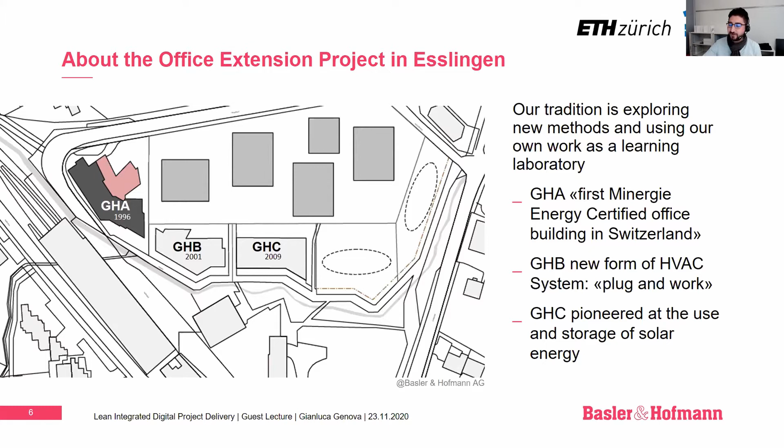And then when it came to the question of the A building extension, we really took this radical decision by saying, okay, it's time to digitalize, it's time to do it at the latest state of the art, and we said we are going to build this building with a BIM methodology, and we are going to build this building without drawings. And that was our first challenge with this project.

So the project is not complex in itself. It's really simple, an extension building. It contains a cafeteria, an extension of the Mensa, the canteen. It has an additional 12 offices on the top, so it's nothing special. But what is special is it's an early adopter BIM pilot in Switzerland, and it was the first project which was fully constructed through a model without using any drawings, or printed drawings, let's put it this way, to be more consistent.

And that's the project where we were lucky, I would say, to win the small project award from Autodesk in the AEC Excellence Awards 2 years ago. And we were also nominated for the innovation category in Arc Awards 2 years ago for this project.

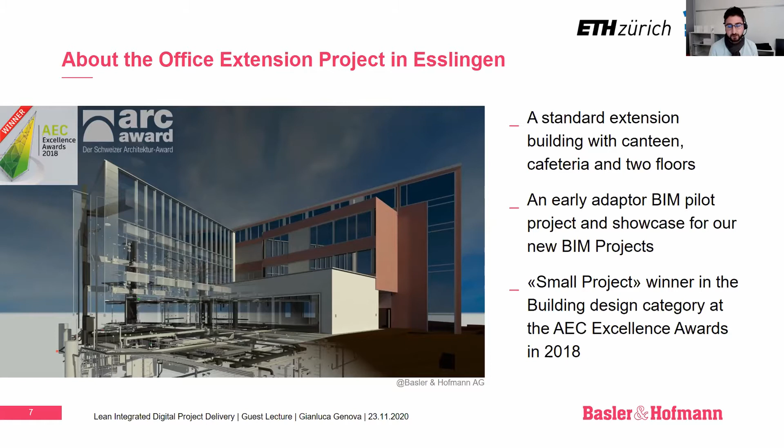So what is special about this project is every participant involved in the project design was from the beginning in this single model. Everyone was working together. Even though the architecture company was not Basler Hofmann, we still managed to integrate it in the model by repeating his work and establishing it in the same model together with him. And at the same time, by forcing everything into one model, we created a single source of truth, making sure that the model is the center of the project.

And because it was our own building, from the beginning it was clear that we wanted to use it for the entire life cycle, because once it's completed, we knew that we are going to live with that building. We will keep the model, and we can use it as a digital showcase to encourage the employees in the company, as well as the clients, to show what is possible if you really go for a fully digital approach.

And we wanted to build it without printed plans, not because we wanted to save paper and do something nice for the environment, but because we wanted to change the mindset by taking away from people the most conventional tool they have, the paper and drawing, forcing them to think in the information model, to think about the model, to think about the processes. If someday we didn't have any plans or drawings anymore, what would you do? To answer this question, we forced them to actually do this. That was the driver behind deciding to not use plans. And we also wanted to try as many new technologies and construction methods as we can in this building.

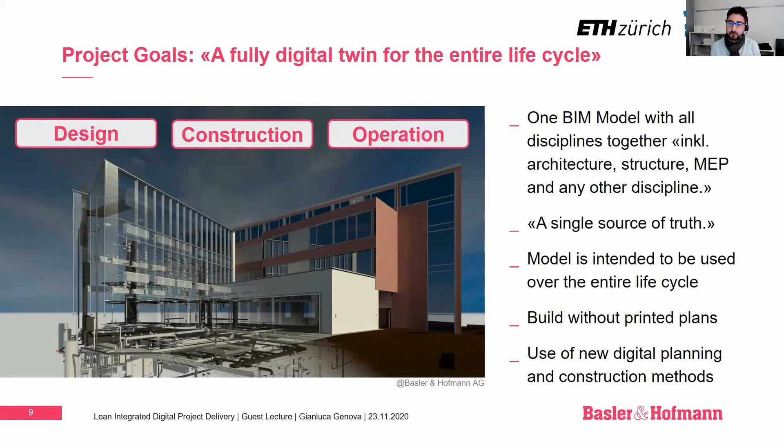I already said the motivation of the printed drawings, but of course, these conventional 2D plans we could neglect in the way that we designed, but we couldn't avoid them for certain processes that we couldn't change because of legal reasons, cultural reasons, and so on. So we did have the plans, we just didn't use them, we didn't create them, we didn't print them, and internally we didn't use them.

But a good example is the permit: to get the permit from the canton, we had to print the plans because they had to stamp them somewhere. So at the end of the day, we still had to print the plans, but we forced it as much as we could, and surprisingly, we managed to build the building without printing the plans. But of course, we still had this 2D view in the project.

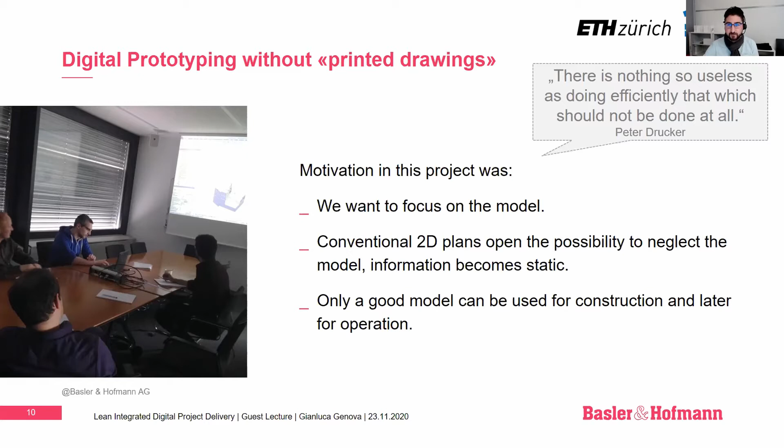So what I always say here: there's nothing so useless as doing efficiently that which should not be done at all. We should not focus on how we can create this 2D illustration of the model faster, because the model itself is smarter. That was also our driving idea here, to not focus on the details and the things that we shouldn't do at all. Instead, think differently.

Starting from the design phase, it was clear that a good BIM model, which has to go over the life cycle, has to be of good quality. So we really have to have an approach to build an intelligent model. Now I will give an example of the MEP design, because that's where my team is and what we are more familiar with. So I will give all the design examples in MEP, but in the construction stage I will be more generic.

In MEP design, there are some aspects which made a model-based or data-driven approach really intelligent, key things that have to be implemented in a model. First, we have to use the advantage of real-time model coordination. I will explain a bit what I mean. We believe that a product-oriented design is essential because you want to know what you are going to build and make sure that such a product exists. System logic embodied seems logical, but I can assure you that most models in the market don't have this logic embodied.

And calculation and simulation from the model is a natural thing you would think a BIM model should be able to do, but again, you have to have really consistent data and a consistent data structure, and your algorithms and simulations should work together simultaneously to actually realize such simulation calculations.

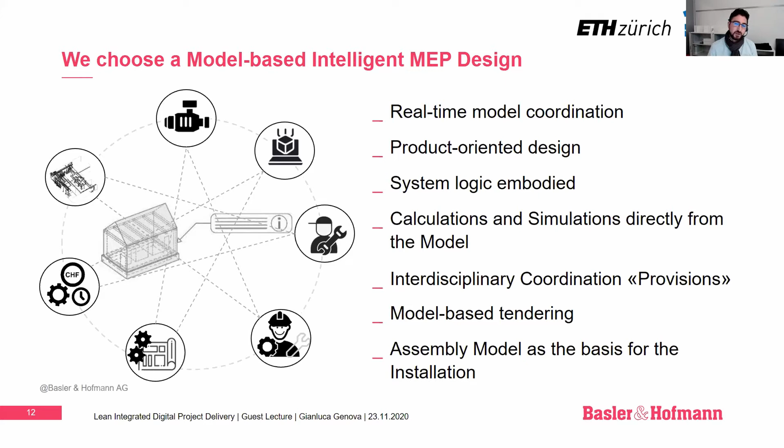So, real-time coordination. Maybe you heard about clash detection; everyone tries to avoid clashes in the model, and everyone would say the best benefit of BIM is clash detection. Well, that's true, but I think that's not the integrated approach we are looking for. I'm more interested in clash avoidance instead of clash detection, because everyone is synchronized and integrated. Why would you even create the clash in the first place if your technology allows you to see what the others are doing? That's the approach we want to implement.

And since then, that's the way we work in our company. We do clash detection just for quality assurance, not as a base or standard process. If you are familiar with Revit or any BIM authoring tool, you know you have this kind of work separation, where every element belongs to someone. There are boundary definitions so that everyone can own an element, close it and block it. Well, that's a good thing.

That's actually how we managed to work all together in one model. But that requires a lot of discipline, a lot of respect for each other, and a lot of communication that people were not used to before. And that was a big change management that we learned through this.

And always when we model something, we have a culture: we always go from the consumer to the source. Meaning, if you know the endpoint where you want to go, you place that first and you model from that back. So on the way back, you can then see other people. The closer you get to the technical room, the more efficient the coordination actually is. That's the kind of thing that we establish. And more communication is necessary.

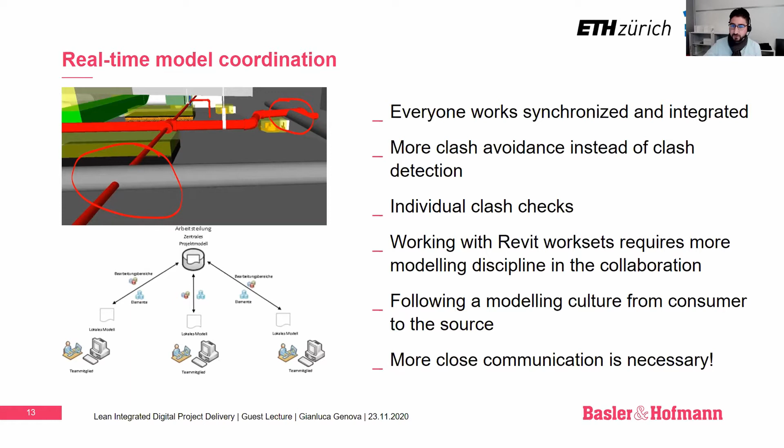You can imagine it like this: modeling all together in one model is like moving on the construction site all together. Everyone should be aware of everyone's movement. You should know who is where, and that requires a lot of communication, which is a good thing, which we didn't do enough in previous times.

Product-oriented design is, I think, the second thing from the intelligent model. Some people will still say you can also do it with generic families or generic objects. They just have to look similar. True, but the thing doesn't just end with the geometries. It has a lot of product-specific information that also influences your internal processes in the model project. And the actuality of this data is something that we as a construction engineering company cannot follow. It's impossible to know all the products in the market and all the data, so we don't want to take any liability with that.

And then functionality is really important for the calculations and simulations. I told you it's really important that there's a consistent structure in everything. That's why you cannot just use the product element as itself in the model. Of course, there are databases or libraries in between that make sure everything is in a certain structure. But what is important is that the functionality of these components is ensured, so that we can do calculations with these elements and the data are correct.

Another thing is, maybe every pump looks the same, so you can say we can use a generic placeholder for that. But there are special things in every product; the installation points are really different. So if you want to make sure that this model is an assembly model in the end, every element that you use in the project should have a certain reality in the backend.

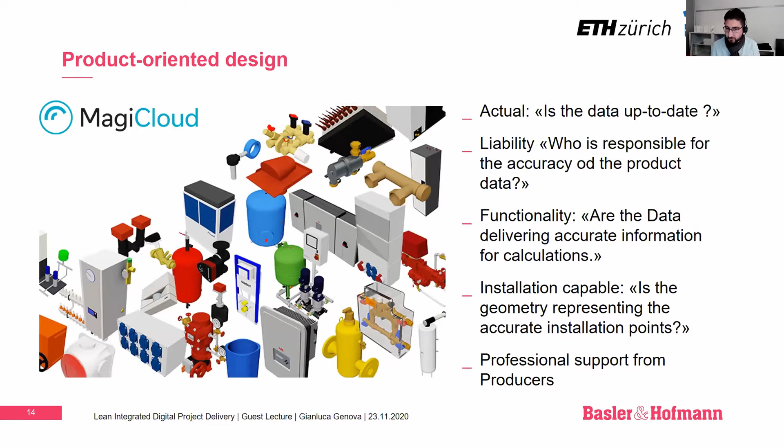And if you do a product-oriented design and you know which products you're going to use, you also get free consulting from the producer, because they are happy that you chose them. It would be a waste if you don't use the potential of this ecosystem.

System logic embodied is really simple. It's the difference between something looking geometrically correct and something being correct in terms of data technology. Every component should belong to a system. It's not just in building systems; it's the same in structural engineering and architecture. Everyone has its own system, and you have to build these data layers into the elements for many reasons.

These things ensure that you don't forget anything, and they also give you potential. They make the calculation possible and help you handle the model in a meaningful way. Because if I give you a model like the one in the picture, it looks colorful and nice, but at the end of the day, a specialist cannot do much with it if the subsystems and systems are not embodied in the model.

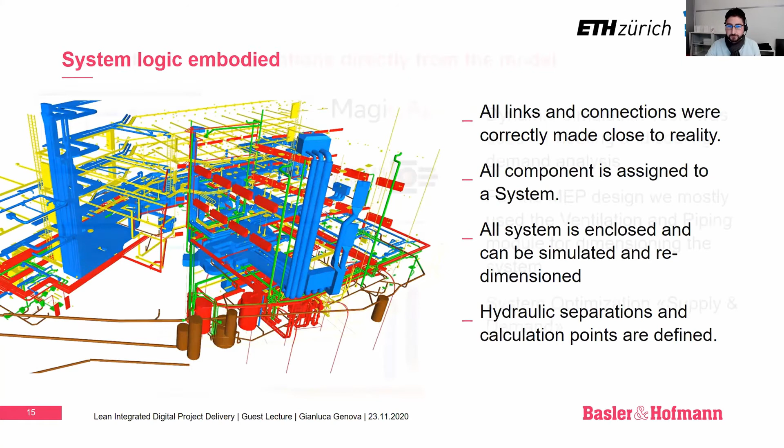Calculation simulation. I will not go into too much detail since you are not HVAC engineers, but what is important here is that the model is used for a supply and demand comparison, that the model is providing the design, the capabilities, the engineering that the client is requiring. And these kinds of things can be ensured through these calculations and this kind of comparison.

You can quickly ensure that every room is heated accordingly, every room has enough light, every room has enough water, and so on. And you can do this kind of comparison really fast in a model-driven or structured model, I would say.

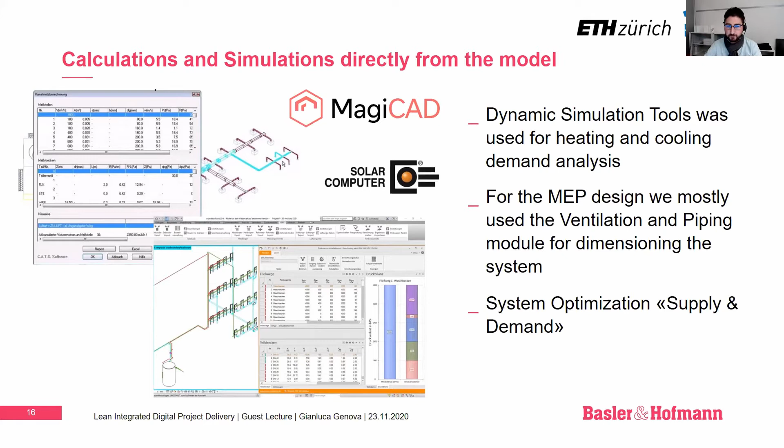Interdisciplinary coordination is coordination when you have more than one discipline involved. A good example is a hole that you make in the wall. A simple hole in the wall requires a lot of coordination. It's not just a structural engineering thing. It starts with the MEP designer requesting a hole in the wall, then the structural engineer has to prove whether the hole affects the statics or not.

Then the hole has to be closed. Then again, the fire protection guy ensures that this hole is not affecting any security, fire issue or code. These things can be done with emails and PDFs here and there, or you can do a smooth data-driven approach by using the model to do this checking through a software, a solution, a workflow that you develop. And that's what we did here.

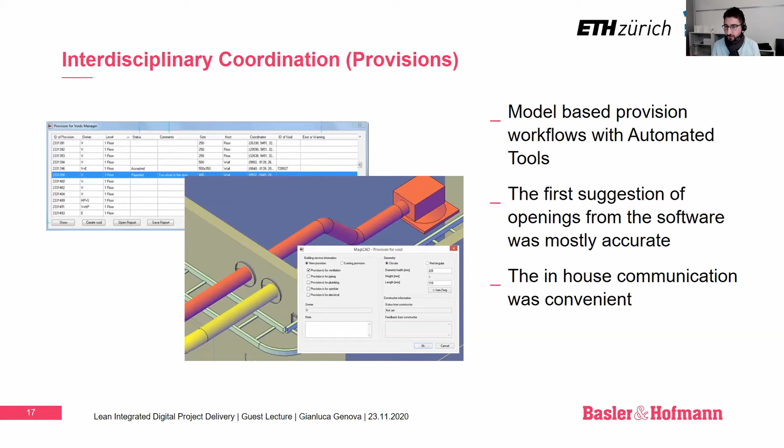We used a software which helps you automate and coordinate all these inputs from different disciplines, and when everyone approved, the hole was opened. And if something was rejected, a suggestion came back. Usually such a process would take a week in a conventional way. In this project, it took us at most a day. These are the added values of working in an integrated model.

I think this is the part where most companies are questioning: when you build such a model, how can we do the tendering? Because most installation companies or contractors are not used to seeing models. They are used to evaluating drawings, and if they don't get the drawings they are used to, they will have a hard time giving a price.

We were actually not sure in this project when we started whether we would get any bid from any contractor, because we knew people would get scared and not everyone would take the risk to do it the first time. So we decided to keep it simple. Let's choose some good partners who can see this as a chance and collaborate with us. We gave them the model and told them, okay, give a price to this model.

We maybe prepared some schedules, but we didn't prepare any paperwork or drawings to help them. We told them exactly: what we are seeing in the model, we want built. So how much does it cost? That was not the ideal approach, of course, but at the time we didn't have anything. We hadn't established any workflow to handle the tendering. And interestingly, it worked out fine.

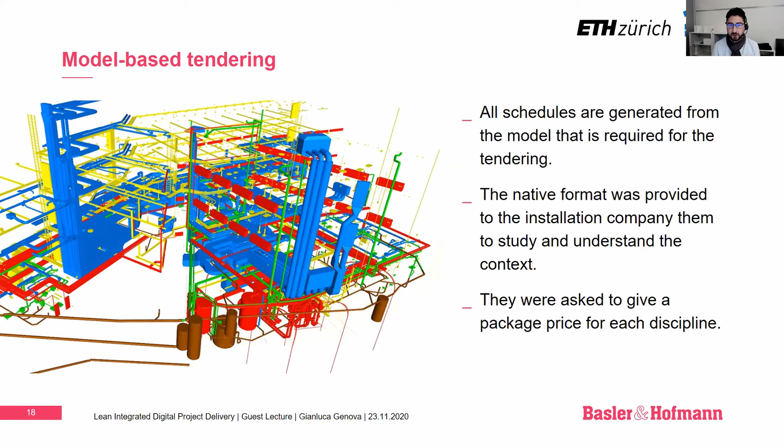Also when the building was completed, we didn't have any issues, and the stakeholders were happy that they didn't have to do all the paperwork, and they could think about the details really early, discuss solutions with us, optimize the model. Those were the added values of having a model-based tendering in the first place.

Then when the tendering was completed, it's not that every model can be built. You cannot take every BIM model to the construction site without negotiating with the installation company to make it an assembly model. Like I said, a building information model is not a building assembly model at the same time. A good example to understand the difference is the duct example I always give from this project.

Imagine a designer says, I want a 10-meter duct. For them, in terms of HVAC engineering, that's just okay. The air flows 10 meters straight through a floor. But for an installation company, there are certain parameters that have to be considered. First, these ducts are produced by a machine.

So this machine cannot produce every length. Every machine has a different maximum length. In this case, our producer was saying a duct can be maximum 1.85 meters. So this is the limitation that was given. It's a parameter that we should know when we build a model.

Secondly, you have to consider the accessibility, the logistics. So there are a lot of things which influence the assembly model. And then where the cut has to be done because of statical reasons, because of other things. And all of these things, a normal design company would not know in detail, because they never had to deal with this kind of thing, because in the early days it was really easy.

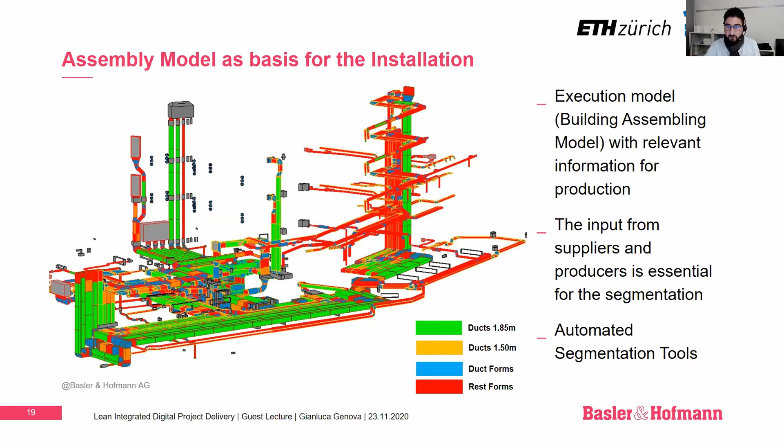And the same we did with pipes, with ducts, with every cable tray, or with other components which have to be segmented. Yeah, that was a good learning, and that's the difference between an assembly model and a building information model. And then we went to the construction site. Building from a model, or model-based construction, requires different methods. I will just briefly give some examples of how we can build a building from a model.

When you have a BIM model and you have it segmented and you make it as detailed as an assembly model, after that, the production is something that you can also do data-driven. So I will go back to this ventilation example. If you have the segmentation there and you know every duct size, what you can do is extract this data and feed it directly to a CNC machine to produce this duct. And we have two advantages here. One is you can control that every product which is produced has an equivalent in the model.

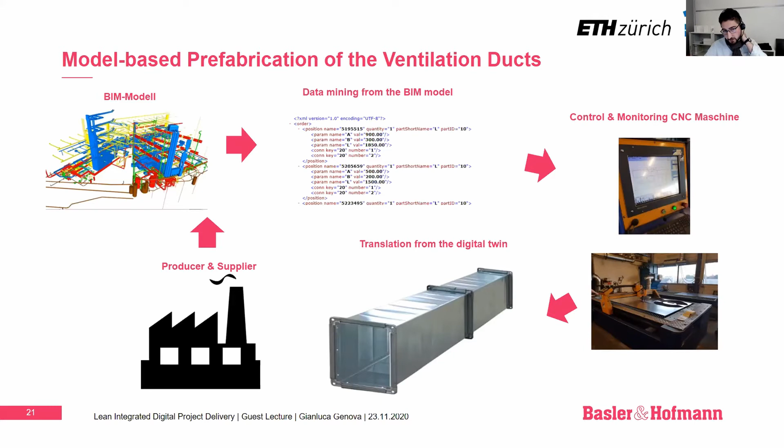Secondly, you can, in this process, hide information within this code so that when it comes to the site again, you can recognize which part of the model it was. So that was our advantage. We hid a Revit ID in the production code so that when these ducts were produced, the producer didn't know what that code means, but for us it was a big link back to the model. So they just stick the papers on the duct and they send it to the site.

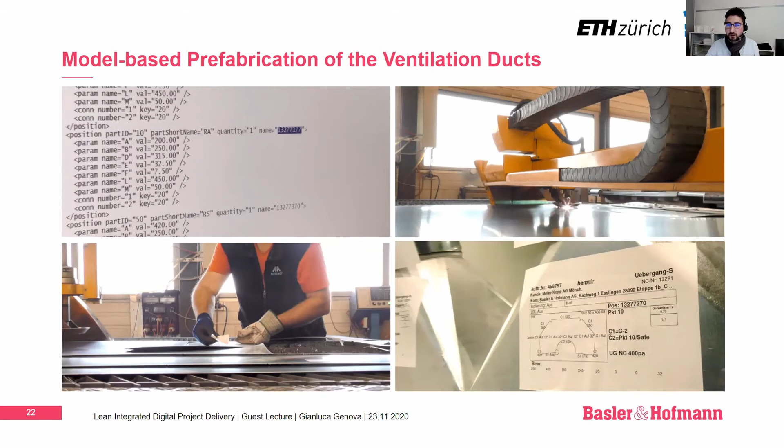And then something cool happened: we could actually manage the logistics with this. We could know exactly which duct has to be installed in which part of the building, and that was a big help. And another thing is the staging. If I would give you the model that I showed you before and say build it, you don't know where to start with the model.

And this is something that we call staging. I mean, staging is not new. It's something that you would also do with the drawings. But in the model, it requires certain preparation beforehand, so that when you're on the site, you can view exactly what you need, so that you don't always see the whole model at once. You just see the information that you require for that part of the installation.

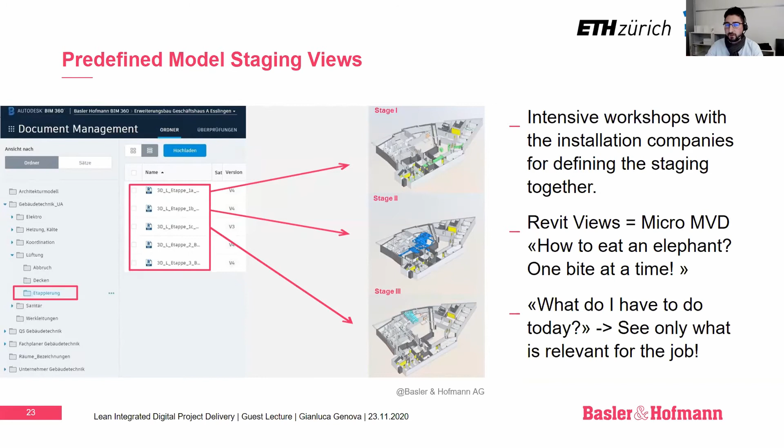I always like this saying: if someone gives you an elephant, how are you going to eat it? You will say one bite at a time, and that's exactly what you do with the model. You cannot build everything at once. You have to go step by step, and the installer will ask you every day, okay, what do I have to do today? Is it possible that I see only the things that are relevant today? And that's exactly what you have to establish in the model beforehand, so that they can handle this on the construction site.

So there are certain model-based assembly methods that we used in this project. One is the visualization model view. It's like using a model viewer directly, visually. It's not different from drawings. Just instead of seeing 2D drawings, you see 3D models.

It's still the same, but it's just cooler. And the second part is the method. It's the point-to-point method. It's really simple. You take a point in the model. It shows you in reality which point is that.

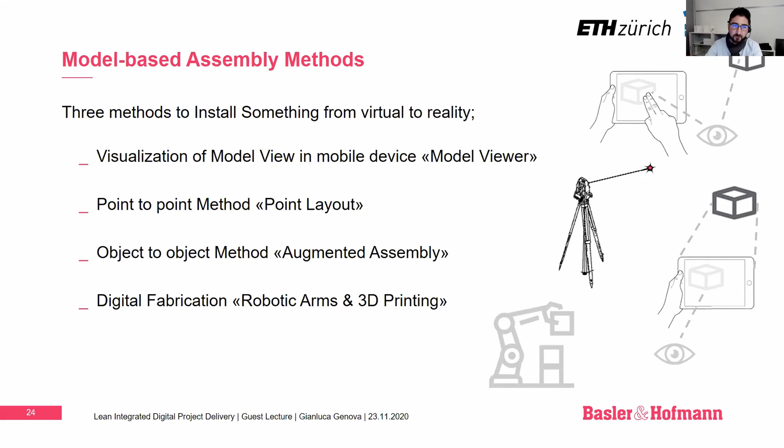Object-to-object method is really similar to the point-to-point method. Instead of taking the point, you take the object as a whole. And digital fabrication is like you don't need the human being at all. You let the robots do everything themselves, and that's where you just rely on them to print or build accordingly. So it's more like they use the object-to-object method and point-to-point method combined, but it doesn't matter. The robot's gonna do it anyway.

So the model viewer version is really simple. Like I said, you have certain staging views that you need to view, and then based on this view, you can measure it from the tablet or whatever, and you can build it accordingly on the site. There is no real added value compared to drawing. You just see it better, you can see the coordination better, you can see the relation better in 3 dimensions, but the information which is delivered is not that different.

So nothing disruptive here, except instead of using a paper, you use a tablet. It's still better than drawing. We don't need to prepare these drawings for each effort, but for the installer, it doesn't change that much.

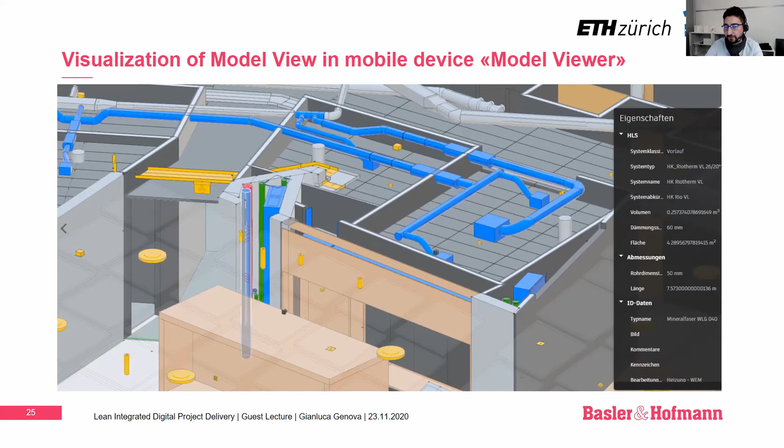So the second method, which was point-to-point layout, is actually a really cool thing. You can select certain strategic points in the model which you think are important. Structural engineers love it. Point by point, they built the whole building. They use it for each column, for each wall, and a corner from the component. And the guy with a pen places the points one by one.

For structural engineering, it's great, but also for installer companies, for example electrical engineers, which have hundreds of components in one room, it was a big help, because you could just place this machine in the middle. You could select any point, and it will tell you exactly where the switch is, where the light is, where they have to make a hole, and all these things. So without using any meter, they finish a room in half the time they would need in the conventional way.

So these are the added values, and the accuracy is really high. Of course, human beings can make mistakes everywhere, but I can assure you on the construction site more mistakes happen. That's why getting a bit of help from a machine with laser accuracy is always better. I'm not saying that people will not make mistakes again, but still less than before, for sure.

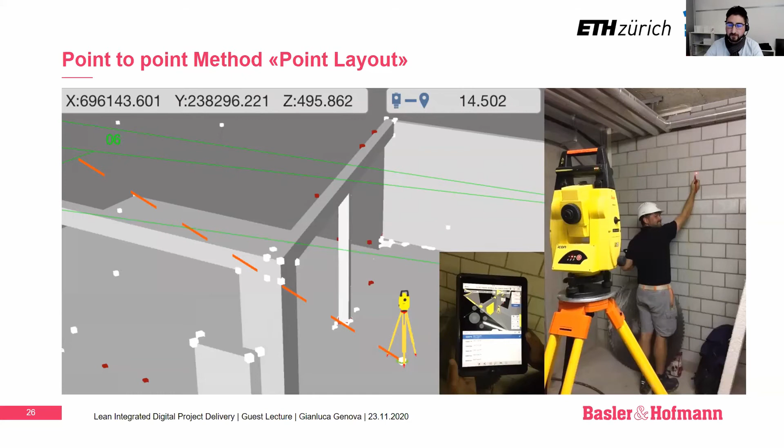And now the third, the object-to-object method. If you remember the duct example and the production that we did with the duct, we managed to stick a paper on each duct when they were delivered to the site. So the only thing that you need now is some device. It can be a HoloLens, a fancy AR solution, or a simple mobile app, doesn't matter, which scans this code and tells you which object it is and where it belongs.

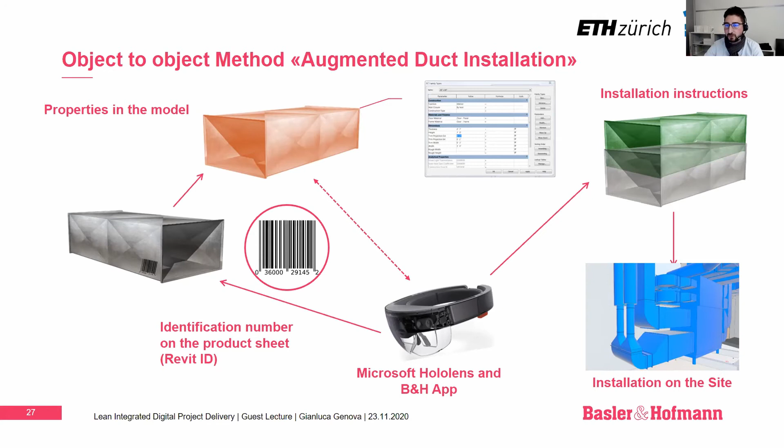You can use this for simple logistical problems. But if you want to make it cooler, you can use AR to scan the duct, and the AR tells you where to place the duct, and even checks if it's placed correctly. So that's what we tried to develop here. It was more an innovation thing to make something fancy, but if you just take a part of this technology or method, you can optimize a lot of processes on the construction site.

So we developed an app, of course. We had to, because that was possible at that time. But the installer guys just use it in a larger room where it's safe to move, because if you ever use these kinds of glasses, they are cool, but they can't ensure that you don't hit something while walking, so it's not really construction safe. That's why you cannot use it on a really dangerous construction site without someone observing you.

So actually, there is no saving if someone has to observe the guy using the AR, the other guy has to use the AR, and two guys have to place the duct. So you need 4 people to do a simple job that before maybe 2 people were doing.

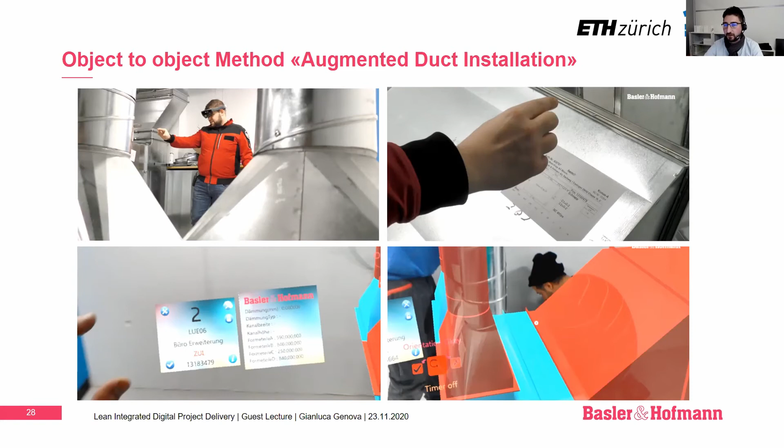So it's nothing optimized here. But in the future, I think once the AR are more safe, installation guys can use them themselves, and then you can optimize a lot of processes.

Right. So another object-to-object method, I mean, it doesn't have to be a duct, it can also be a wooden piece, is this acoustic wall that you see now in this picture. It's a research project, actually. It's part of our cafeteria decoration, but it's also an ETH research project together with Gramazio Kohler Research and the Digital Fabrication Lab, together with Erne Holzbau, which is our industry partner in this project, who actually built this acoustic wall.

What is special about this wall, or this acoustic installation, is it's firstly produced by a parametric design, of course. Everyone knows Dynamo, Grasshopper, so that's nothing special about it. But there are two special things on this project, maybe. One which I found special is this object inertial tracking. That's the fancier expression of my object-to-object method, but it's the same, not different than the duct. For each wooden piece, it will tell you if it's placed according to the model or not.

But what is more interesting is that the shape that you see here is not just a nice looking shape because it's decorative or aesthetic. It's because the design was informed by the result of an acoustic simulation. So actually, we did different measurement tests in this room, and we took the negative of the simulation results to reduce the noise at maximum with just a unique shape, right? And that's always nice because it's physically informed. It has a physical meaning behind it, and usually forms that are defined by nature are the most beautiful and aesthetic ones.

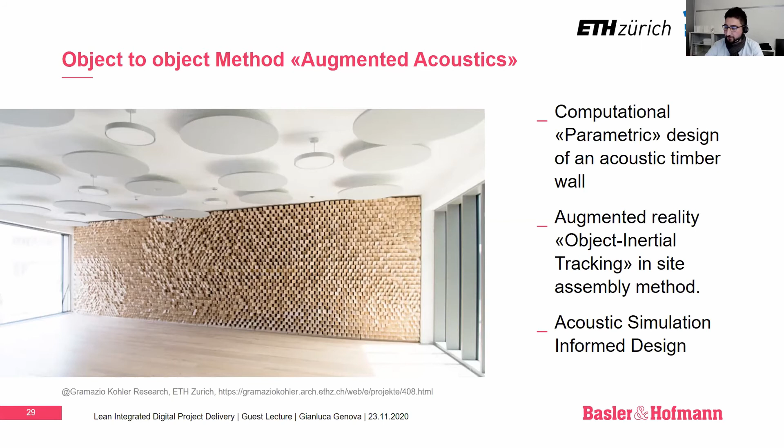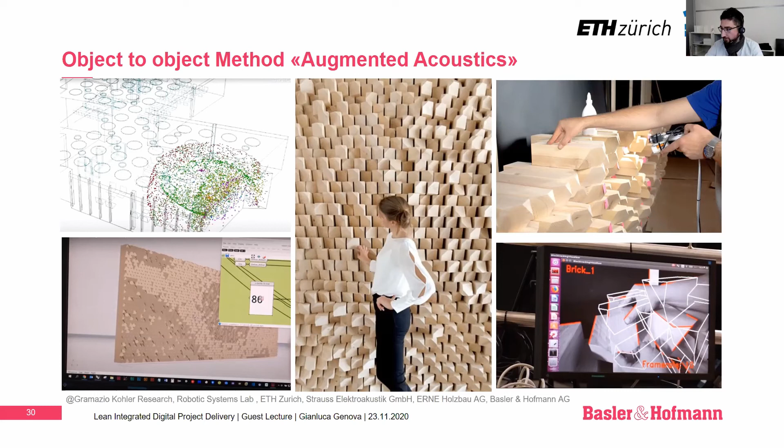So you can see the simulation here. That was the input to the parametric tool, and on the right side you see the AR. This time it's not a glass, it's a camera, but principally the same. It checks if objects are in the right position. If not, it's red. If it's green, it's cool. So basically that's how it works. And you don't need any drawing here to build this wall. Actually, I don't even know if you can build it with drawings, but that's, I think, the cool part.

The next digital fabrication example is the future tree. You see the wall, it's in the cafeteria, and just outside this cafeteria and the mensa, there's this fancy tree, we call it. It's a combination of parametric design and robotic prefabrication. There are two different technologies you can see here. One is the column that you see from the tree is 3D printed. It's called Eggshell, also together with ETH. It was a collaboration project.

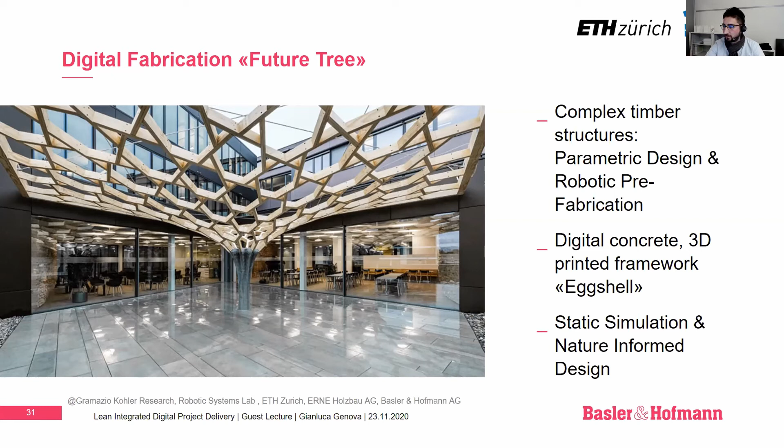Also with Gramazio Kohler Research, ETH, the Digital Fabrication and Robotic Systems Lab, and Erne Holzbau again for this construction. And this time, what was the shape giver? One was the statical simulation, and another was the natural limits of the material. So these two were the drivers of this design and this shape. So when we say data-driven design, it's not just data that we produce, there are also scientific data that can inform a design.

So what is special about this is the 3D printing part. So actually we didn't print the concrete, we just printed the shell. And the shape of this shell is unique because of the durability of this material. It's a plastic polycarbonate component, which I think took several tries. If you are at ETH, you can go down to the labs, and I think someone from the lab can explain it to you in more detail.

But what is unique here is, if you see the shape, it doesn't have too long cuttings. It always has this unique diamond shape, and this is because it uses minimum material to withstand the maximum pressure of the concrete. That's why this shape is made. It's the result of the material properties, and that defines the shape. And it's also aesthetic, but it's more cool when you know the scientific reason behind it. And then the steel was a prefabricated steel piece, installed inside, and it was cured.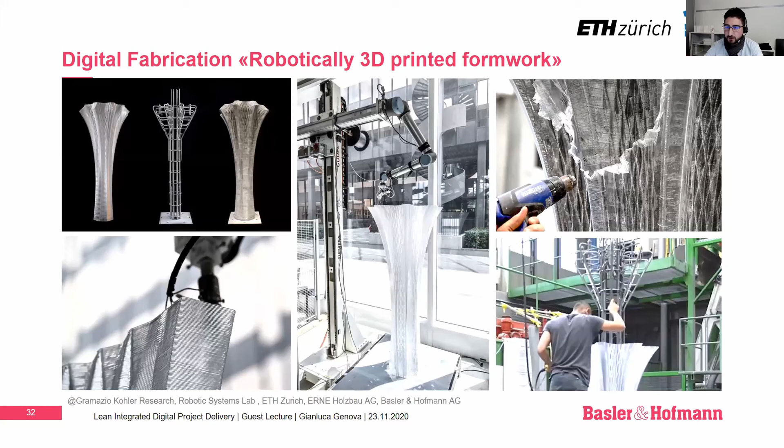And then it's called eggshell because you can then peel the polycarbon formwork out of the concrete wall column. And the robotic assembly arms are the same. We have this parametric model with all these nails pre-parameterized. I mean, you could play with the geometry and it will adjust itself. It's a statical model that was behind it. And once you have this model, the robot arm will just install it based on this 3D model, this upper part of this roof tree.

It's exactly the same technology which is used in the Arch_Tec_Lab in ETH. If you look at the roof, it's exactly the same company, the same robot, and it's the same technology. But the only difference is it's like a self-standing tree. It's just a different form.

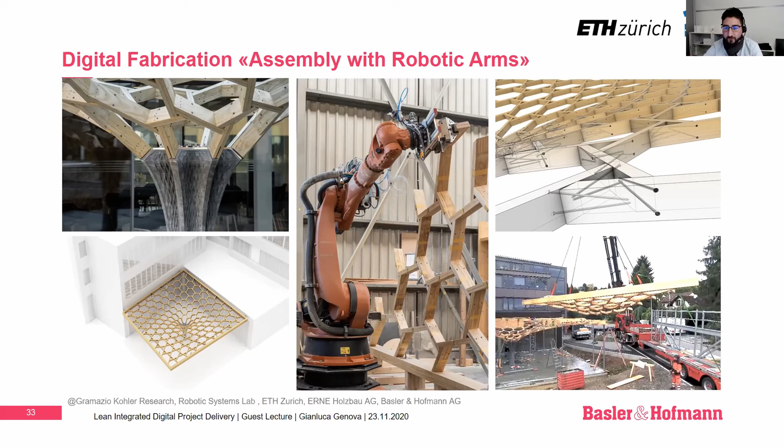All right, what was the experience with the model-based assembly? Everything starts with the coordination with the contractors, installation companies, whoever you want to call it. It has to be as early as possible because their input influences the design of the model. The acceptance of the construction site, surprisingly, was really good, but the change process should not be underestimated. The assembly work preparation was done from the model way before you came to the site. So actually they could solve most of the construction site problems without even starting the construction site, which was great.

And the supplier, not the installer companies, but the supplier and producer, if you go in the whole ecosystem, one step even further, their input is even way more important to get an accurate model. Remember the example of the duct installer. If the producer wouldn't tell us the machine capabilities, we wouldn't install it or prepare the model in the same way.

And staging, predefined model views are the key for model-based assembly in the BIM world. I call them micro MVDs. In buildingSMART, we call it model view definition. In Revit, it will be a view or whatever. It's just a partial piece of the model with certain geometries and information. That's what I understand here. It's really crucial.

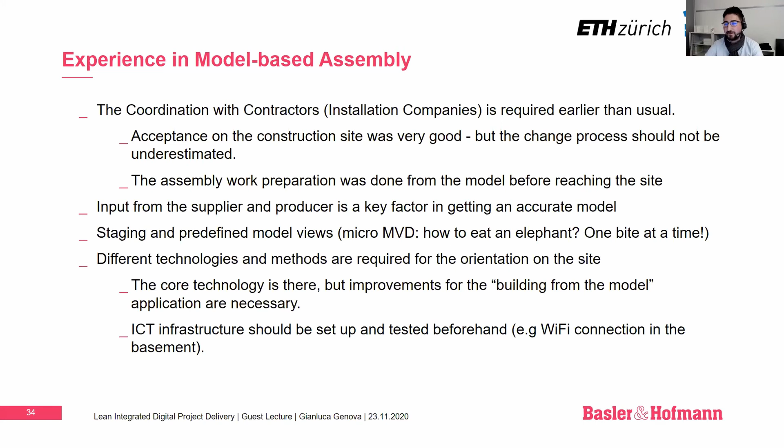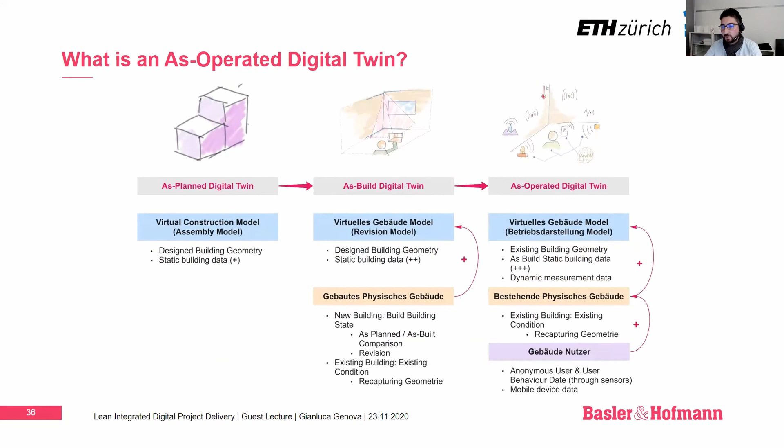Right, operation phase. Learnings after 2 years of completion. We built this building. We are already in the building, working here. There are some learnings. In order to understand the difference between an assembly model and an operation model, you have to understand what's an as-planned model, a digital twin for the as-planned model, the as-built model, and the as-operated model. They're all different, right? And we are now questioning what is an as-operated digital twin. I will not go into detail because I am over time.

So what is important here, there are two things that we learned. One is that an assembly model is not necessarily an operation model. And in order to create a reliable link from the operating building to the model, you also need to have the sensors, the data collecting points in the building.

And that's kind of the most important thing if you want to create a sensor data infrastructure, so that you can get live data and you can compare the state of the building with the planned state of the building, or the built state of the building, and you can always update it.

And sometimes you have to transform your information for a CAFM or an operation management system. And if you didn't think about it from the beginning, you will have a big problem once you build a building: your building is not an operation model, so you have to apply a digital retrofit approach. What is a digital retrofit? It's like you start to reinform the built model based on other logical information, so that the operation system can actually understand what you mean.

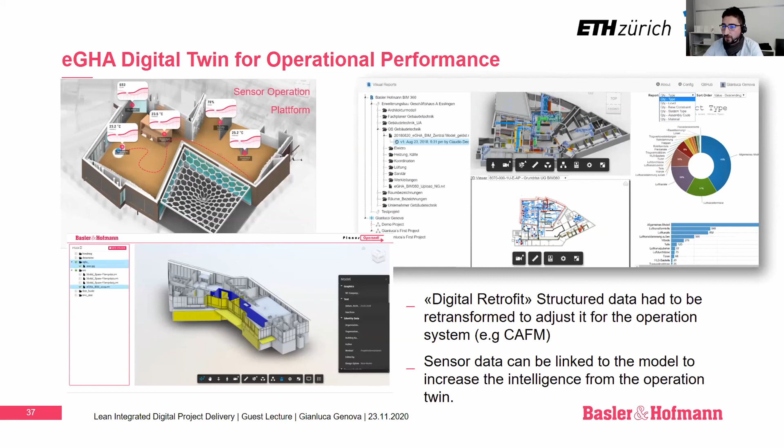I can give you one example. In a typical Revit model, an object will not know which room it belongs to. From the construction point of view, you don't have to. But from the operation point of view, you have to specify this kind of information. And that's why you have to feed all these elements with this kind of information later on.

And this was a bit challenging for us. We know how to do it. We did some testing, but then we gave up because it was not paying off anymore. But it was also not the main goal of this project.

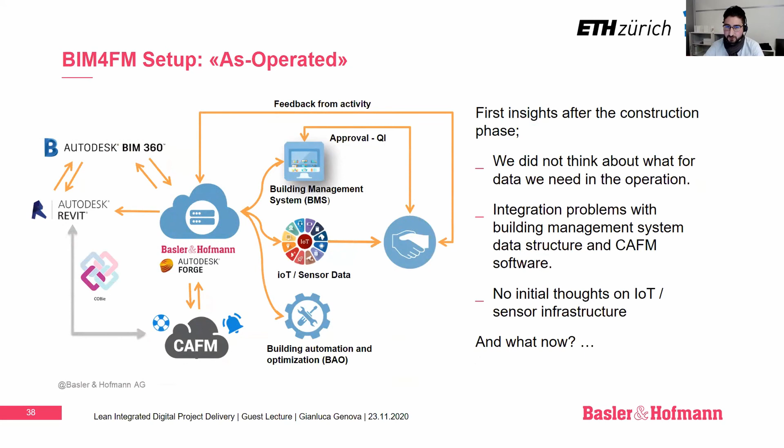So what were the lessons learned? An assembly model, a digital twin, is not necessarily the operational model. Facility management should be involved the same as the stakeholders. Like if I involve the installer company in the decision making and the model construction, the facility manager should also be involved at that stage, because only then it pays off. Only then it makes sense.

And we learned that data can inform data. If you have a structured model, it doesn't matter if that particular information is not in the model. With a structured model, you can reinform it, and there's no limit to that. The question is always at which point it pays off.

Okay, what we learned from this project is we work together over all phases. Like I always said, producer, installer, specialists, engineers, they all have to come together around one model if you really want to make a continuous, unbroken digital approach. And that's why it's a challenge, because that's not typical in the Swiss construction industry.

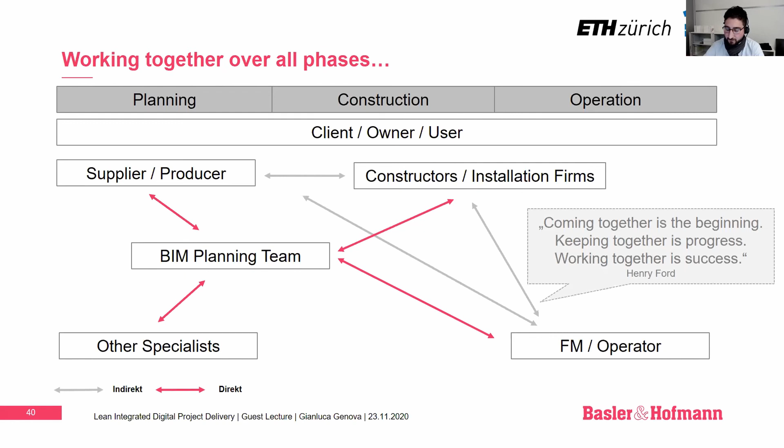That's why you have to avoid most of the cultural barriers here, and you have to really involve as many people as you can at a really early stage, when the model was established. So coming together is the beginning, keeping together is the progress, and working together is the success. That's what Henry Ford said, and that's, I think, what we tried to manage, partially, in this project.

And the benefits of a fully digital approach: well, system integration allows you to optimize your engineering. New installation methods can save a lot of construction time. Prefabrication reduces waste and logistic complexity. If you manage to control the production, you can also manage to optimize the construction site.

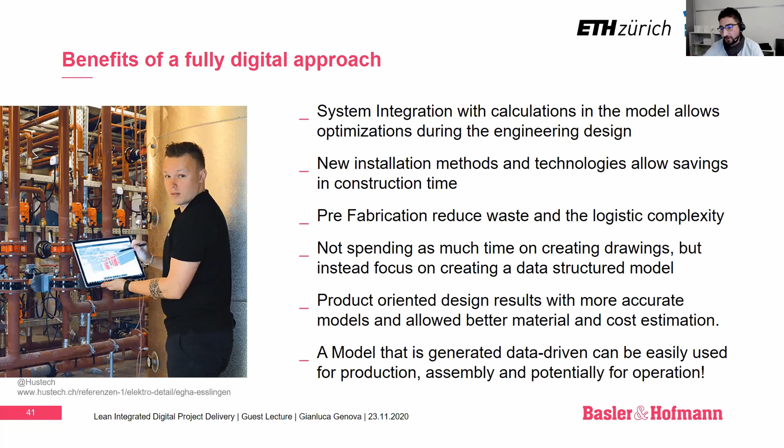Not spending as much time on creating drawings, but instead focusing on the model, the data-structured information model, is really the biggest game changer here. Product-oriented design is necessary for having an assembly model, for better material output and cost estimation. And if a model is generated data-driven, you can easily produce and assemble it. And potentially for operation it was also necessary, but you also have to know the processes related to the operation.